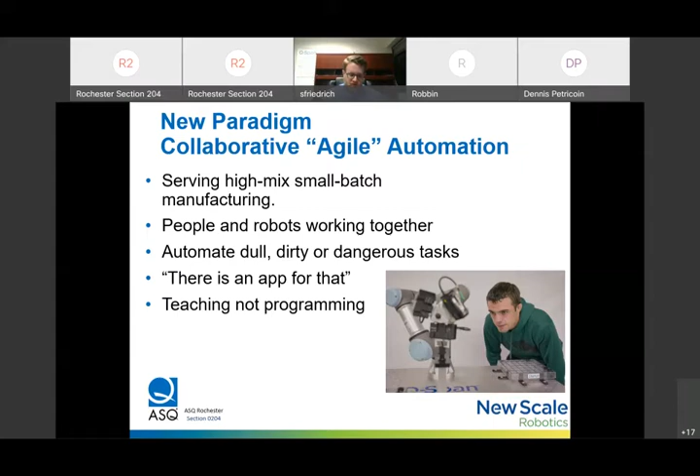These are often called cobots, which you'll probably hear a few times throughout this presentation. Some of you might already be familiar with them. And today, collaborative robots are the fastest growing industrial robot segment. Collaborative robots are different. They still do what most traditional industrial robots do. They automate repetitive and boring tasks, but this greater accessibility to automation has been made possible with cobots because of two main differences from the more traditional robotic systems you might be familiar with or may have seen in larger manufacturing sites like big automotive plants, for instance.

So these cobots are categorized as collaborative because they're force and speed limited, and typically they're able to operate around people without any guarding. You got to do a safety assessment if you attach something sharp like a needle or a knife to the end of the robot arm. It's probably not collaborative and safe anymore.

The interface has been made a lot more easy to use, taking more of an app-based approach to automation. Any new commands you teach to the robot are done right through a tablet that controls it, called the Teach Pendant, which is about the size of an iPad.

Most of the time when people start using the robot, they can have it complete some pretty simple tasks with just about 20 minutes of hands-on time. The fundamentals course for these robots is usually only about 2 days, and that's all most people need to learn to teach these new robots new processes. The robot interface has been designed to be usable by everyday employees, so you don't need to be an engineer or programmer on staff to use these types of robots on a day-to-day basis.

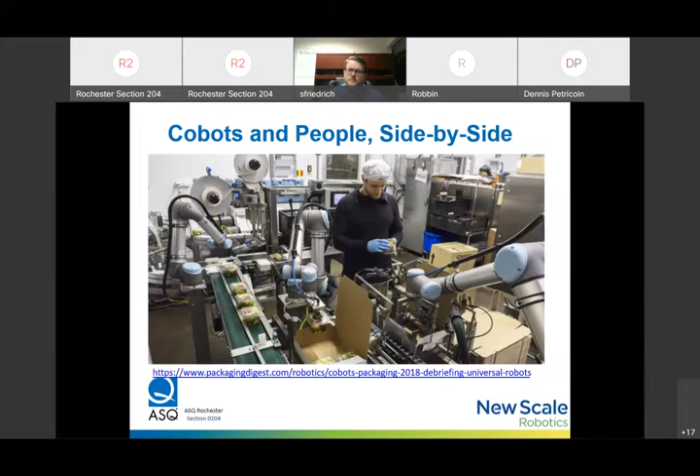A primary benefit of collaborative automation is that you can support higher mix applications, and you don't need to dedicate a robot to one task and one task only all day long. Generally it targets about 10,000 parts per month or so.

You can automate at roughly the same speed as a person, take up about the same space a person would need to perform a task, and improve the repeatability of the process. That space constraint is particularly important if you're operating in a small, space-limited metrology lab, or on the production floor and have to squeeze something in next to a machine.

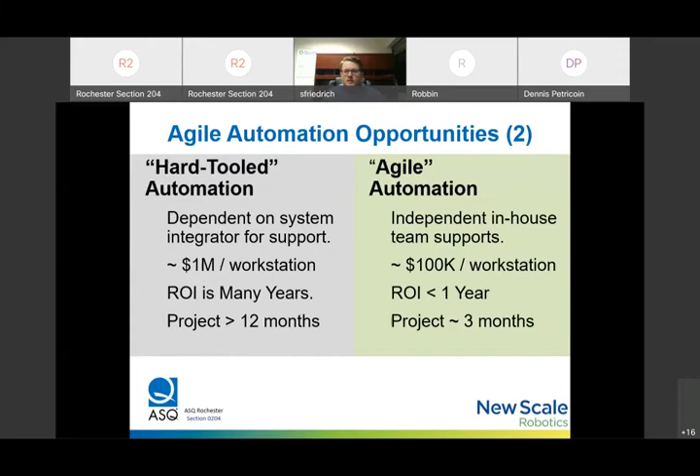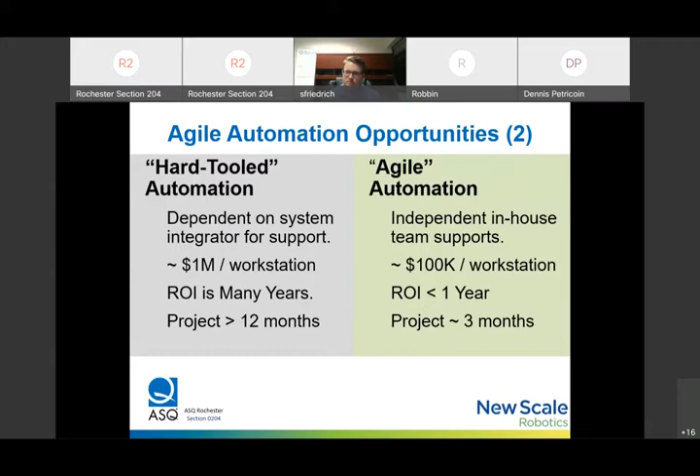In general, you can deploy these new automation systems with your in-house team. It takes up a lot less time to deploy the system and money to implement them, if you follow the appropriate steps and more of an incremental automation process, which we'll talk about as one of the best practices later in the presentation. If you follow this process of dividing automation into smaller projects, usually you can deploy something within 3 months or less, where more traditional systems might take 12 or more.

By far the biggest challenge we hear about on a daily or weekly basis is the labor shortage. It's something we're dealing with here at New Scale in some areas as we try to manufacture products. Most companies we talk to describe it as their top priority for the foreseeable future because they have an aging workforce that's retiring faster than new people are coming into manufacturing.

This puts stress on the existing team, which is probably smaller than it needs to be. And to keep up, you've got to maximize the output of each person. If that labor is not available, you might need to look for automated solutions to fill those gaps.

So we're seeing a lot of people either consider automation for the first time or accelerate their plans, because they either can't keep up and have these QC bottlenecks, or they can't find enough people to produce and inspect the products they make.

Generally, these larger automation systems I've been talking about used to be too costly for small businesses to adopt, but collaborative automation is making solutions more affordable. I think it's interesting, some research done by the MIT Task Force on the Work of the Future that I wanted to quote here.

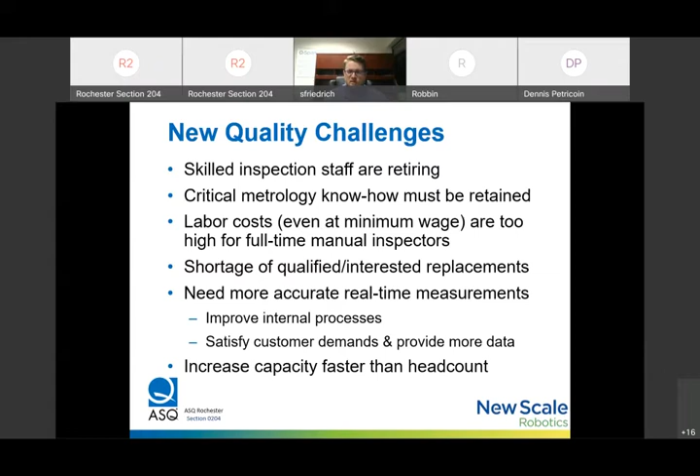So far we've seen a lot of early adopters use these types of robots, but we're starting to see more and more people reach out about automation and consider it for the first time, given all of these new challenges they're experiencing in the quality department in their company.

So quality applications have been of interest, but have generally lagged behind other more production-focused robotics applications, like machine tending, packaging, welding, or finishing type applications. We're definitely starting to see that trend change, with more people considering quality.

We talked with one guy and he said, I see everyone else getting a robot here, and I'm just in my metrology lab wondering, where's mine? I could use one. So with some of these challenges in mind, I wanted to look at some of the motivations we're seeing for quality on a day-to-day basis.

And the types of applications that you can look out for.

The first thing I recommend looking at is where your quality team spends the most time on manual inspection processes. We find that robotic systems that can fill in the hours of one full-time equivalent, about 40 hours per week, usually give people an acceptable return on investment, which can justify the use of a robot in the quality department.

But if you're at 80 hours or more, that's definitely ideal. Obviously, if you're able to use it more, you get a faster return, and more uptime is good. So that 80-hour mark is a good target, especially if you're running 2 shifts per day.

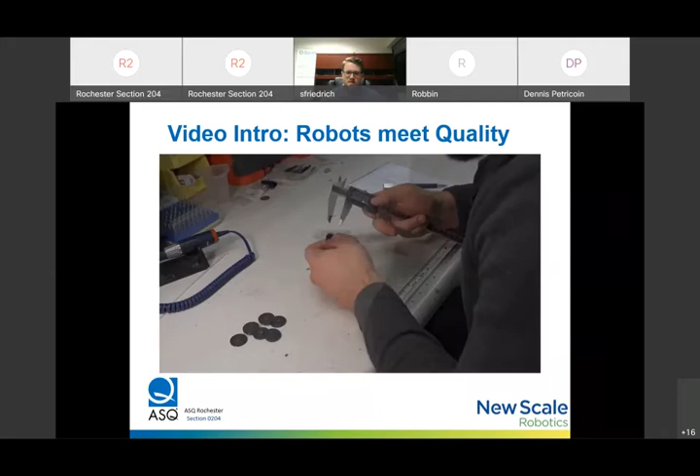We find a lot of the time manufacturers don't have a really good grasp on how much time they spend on quality and inspection. I mentioned that's an important metric for identifying which types of applications you should look at for automating. I think this is because a lot of teams don't necessarily have one person sitting at one station doing that same thing all day long. It's a lot of different tasks.

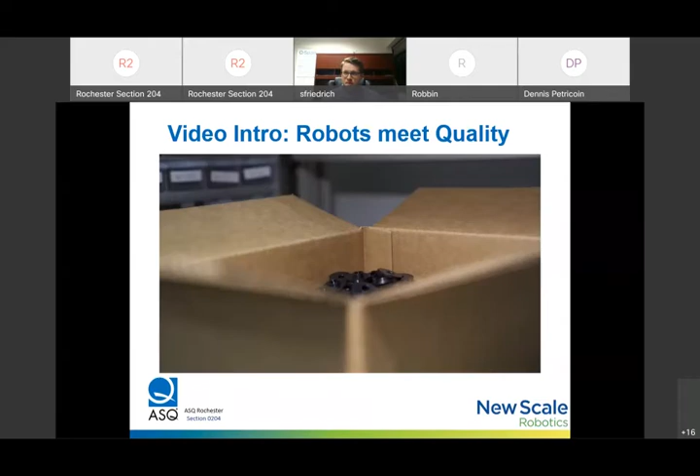We've been talking about higher mix type applications where you're measuring one part for a particular amount of time, and then you swap off and you're measuring something else a little bit later. So we find that the best candidates for automation are not the hardest QC processes you have, but they're things that are very simple and time consuming.

Depending on the complexity, it might be worth automating if you spend 4 to 5 hours per week on a particular inspection task. And if you have 8 types of parts to be inspected, each at 5 hours per week, that adds up to one full-time equivalent, that 40-hour mark that I've been talking about. Certainly if you have tasks that fill up more time, even better and easier to deploy.

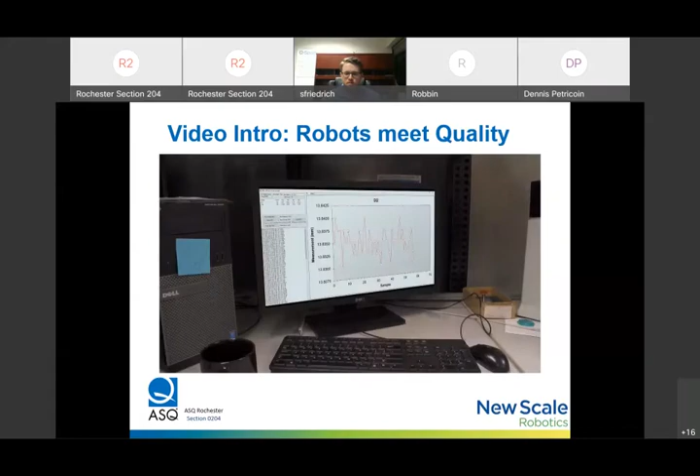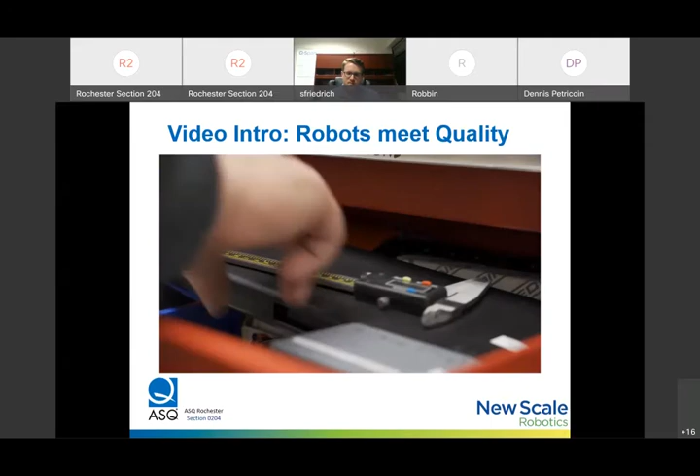Depending on the application and setup for a particular project, with these types of robots, a lot of the time you might need to swap out a fixture or two, or load up a new program, but that should only take a few minutes. Again, it's kind of application specific, but being able to change from one task to the next in about 5 minutes is, I think, pretty powerful and keeps your team flexible.

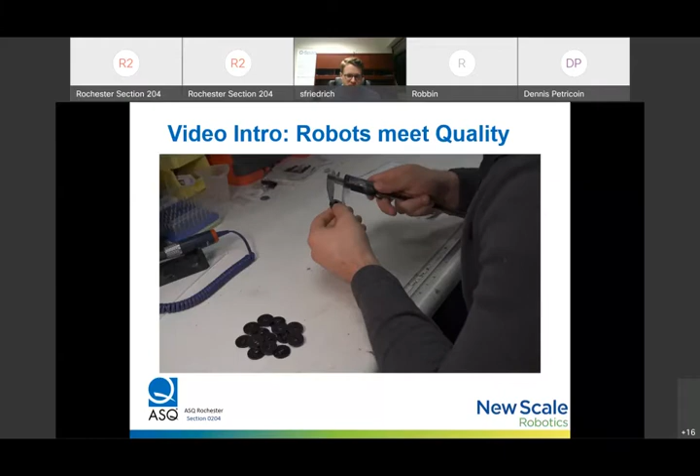So this video shows our product, the QSpan workstation. Since I'm talking from experience with a lot of these applications we'll be running through, I'll show this system a few times. We're just going to kind of describe what we're doing here.

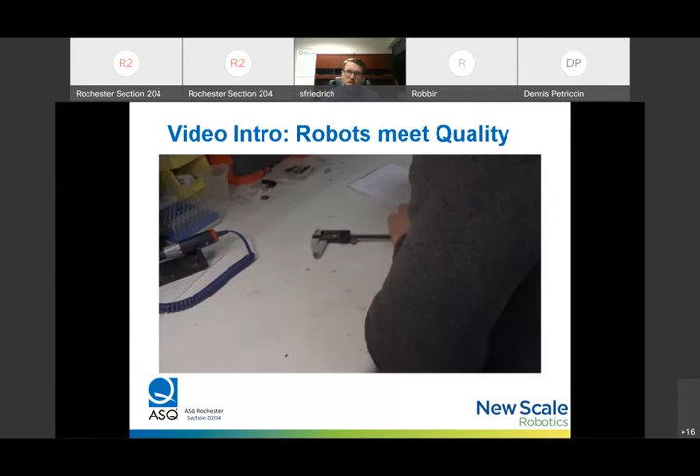We use a robotic gripper that also functions as a digital caliper. So it lets you do material handling and also part inspection, and dimensional gauging plus data logging, all with one tool. So just keep that in mind as we're going throughout.

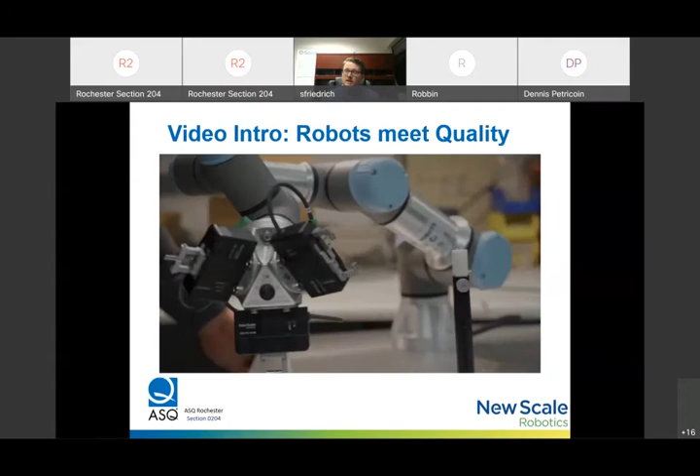As it picks up the part, it is measuring it, and that's part of one of the technologies I'll talk about today. But in general, where I'm showing the basic concept that I've been talking about, it's automating at about the same speed as a person would need to perform at for their daily functions, taking up about the same amount of space they would need to sit at a bench and inspect parts.

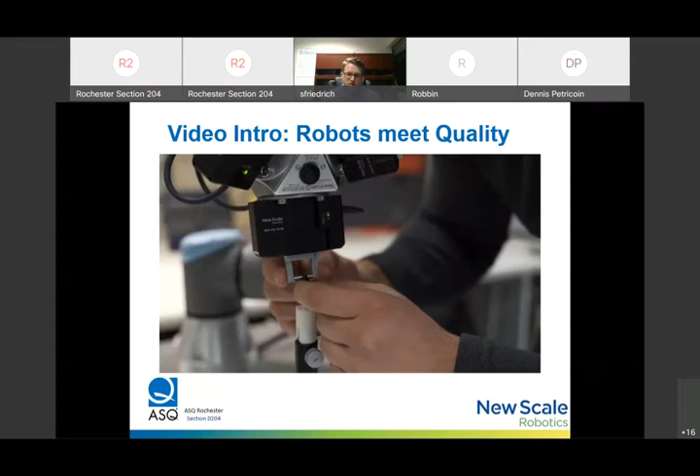And you get all the benefits of automating with improved repeatability, automatic data collection, and then that person can go do something that's less repetitive and more productive and better suited for a person than a robot.

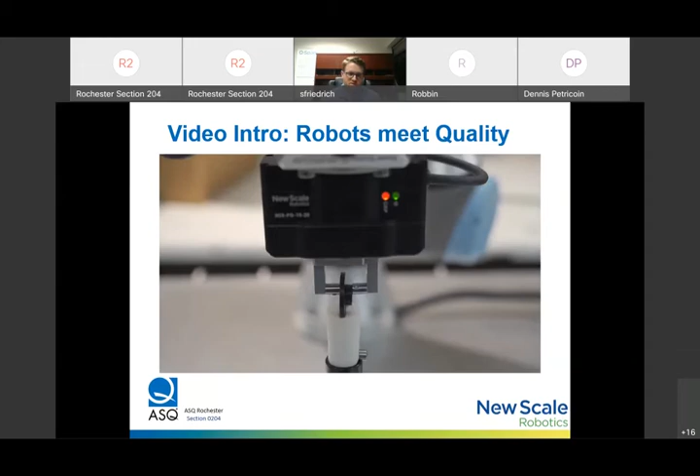So when we think about ideal QC tasks to get started with, it's really the same as any automation project. I'll reiterate this because I think it's important: we find that the best candidates for automation are not the hardest possible processes you have, the ones that give your team the biggest headache every day, but they're things that are just simple and time consuming for your team. So approaching automation one step at a time with that in mind is important, particularly if your team's just getting started with deploying robots.

So this idea of incrementally breaking up the projects is really a good way to divide the big goal into smaller, more manageable projects, and also manage your expenses, reduce the risk of the project not being deployed, and reduce schedule and scope creep. It gives you smaller successes to build off of each other, builds confidence in automation after each step, and gives you a positive return on those smaller investments as you move through automating all 10 steps in that process in the future.

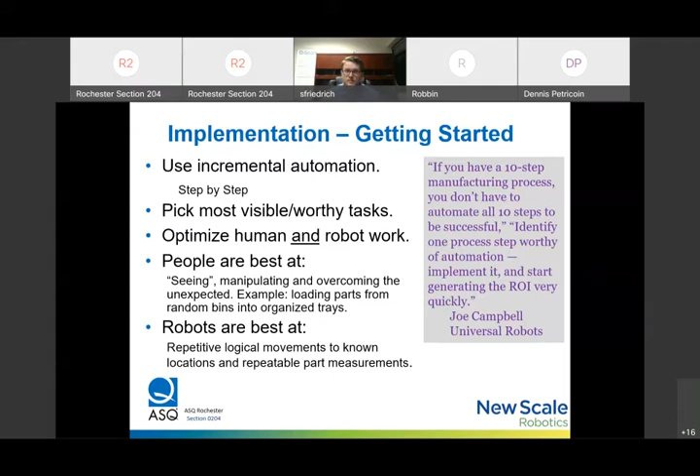So I'll kind of break this up into contact versus non-contact type solutions. After you identify a gauging process or other types of inspection tasks that are time consuming and worthy of automation, it's important to identify the types of gauges you're using, where you're using them in those processes, and the available automation tools to help you actually automate those tasks.

So a lot of the time, the gauging is being done on the floor by the machine operators, machinists, or other production staff as part of the manufacturing process. And that's, I would say, 95% of the time where we see interest in deploying these systems is not in the metrology lab, but actually on the production floor.

So usually we see manual gauges being used, things like calipers, bore gauges, drop gauges, air gauges, go/no-go gauges. They're really great for checking dimensions quickly, referencing a drawing, but if you're doing them all day long, you're bound to run into some errors.

It's overhead cost for your company, and some people even have turnover just because they have someone doing inspection all day and it's so boring they just want to end up doing something else.

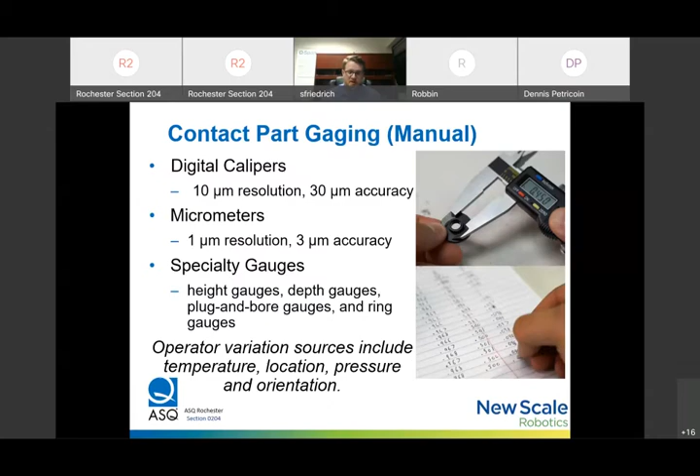Newer manual gauges have started to incorporate technology to connect them to QMS or SPC systems, embracing the trends we're seeing in Industry 4.0 of needing easy collection of digital data. And they're usually wired - there's some wireless solutions available as well. But each data point still needs to be collected manually, often by pushing a button or using something like a foot pedal. And we're seeing a huge requirement for more and more data to be collected in manufacturing processes.

And that data and the integrity of the data is definitely important if you're working in a regulated industry. So using robotics to help you automatically record and store that data should definitely help you improve the accuracy of the data collection. You reduce the likelihood of falsified data and help you avoid non-conforming inspection ratings.

So we're starting to see many manufacturers recognize the benefits of digitalizing their data and searching for solutions to interface all their measurement tools for analysis into a single software program whenever that's possible. It's just easier to have everything in one place.

So I thought it was interesting though, in Quality Magazine, they spoke to Infinity QS, and they said that after talking with 260 manufacturers, they actually found that 75% of the people they surveyed still collected data manually, whether it was these tools or something like writing it down by hand. And that 47% of those they surveyed were still using pencil and paper.

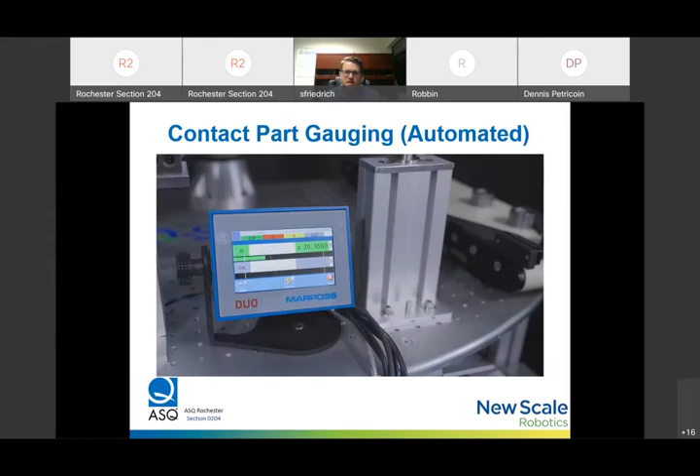So here's a contact part gauging example using the QSpan system. We use the UR robot, the robotic gripper calipers, automating material handling and contact part gauging.

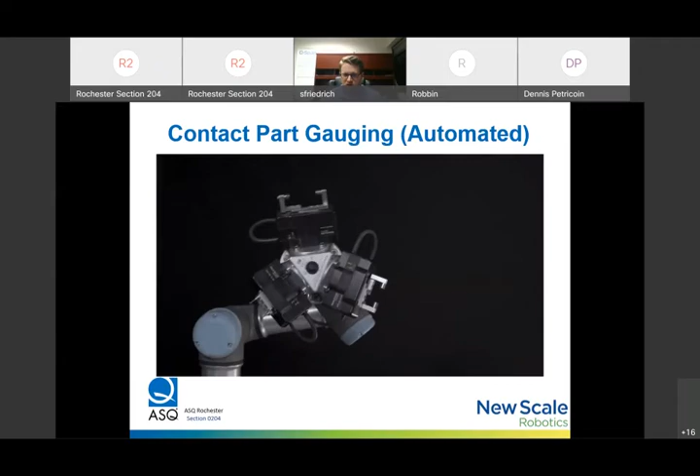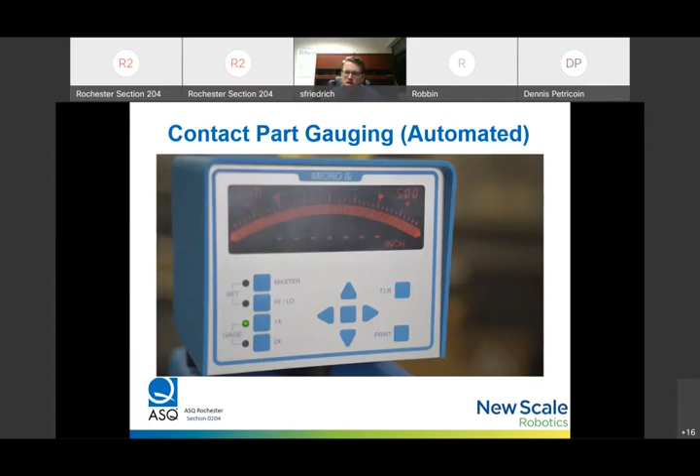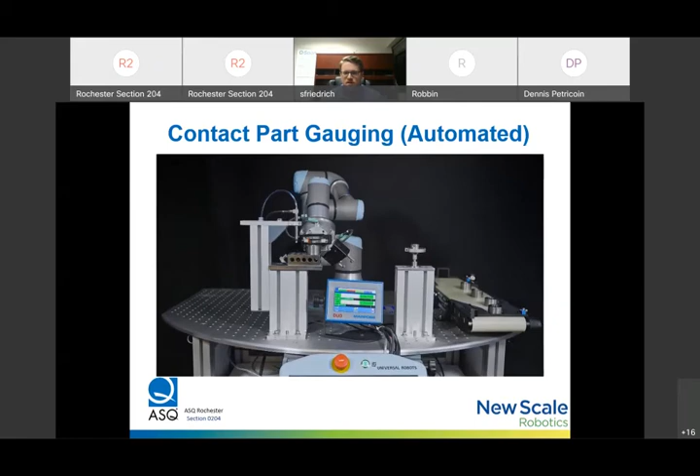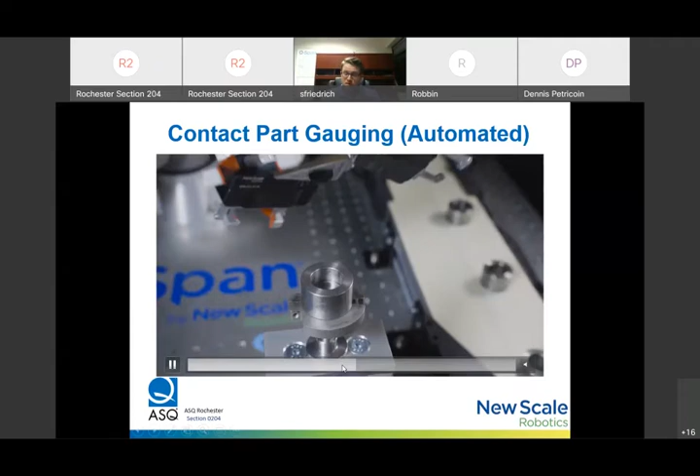So we know that calipers are not the only tools that are used for automating inspection.

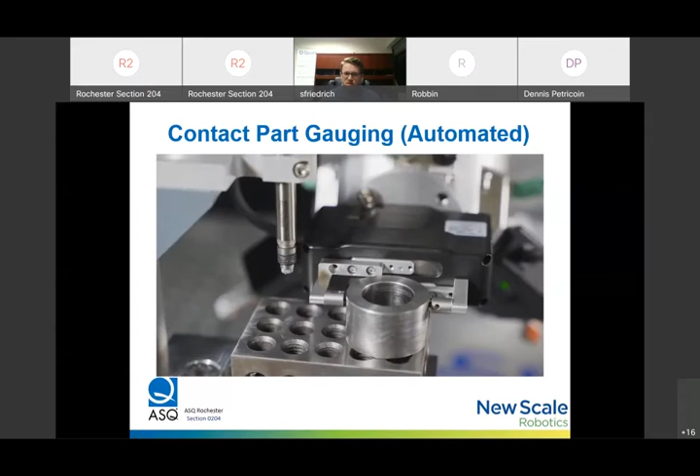Here we're showing the robotic caliper picking up the part from a known location at the end of a conveyor. We load it onto a bore gauge to measure the inside diameter. We bring it under a pneumatically actuated LVDT probe, which functions effectively as a height gauge, measuring the height of the part. And then finally there, we just measured the outside diameter with the robotic caliper, using precision flat fingertips to measure that OD, and then move to the next step.

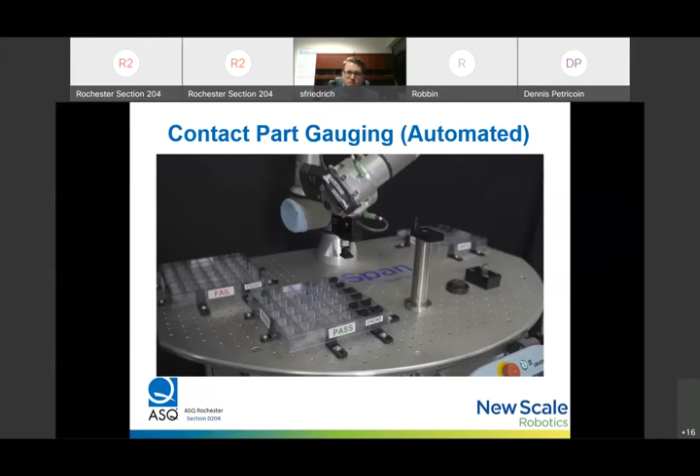So usually with contact part gauging like this, rather than pick and place, you're picking the part, measuring the part features, recording the data into your quality system, and then placing the part into a pass-fail location, or sorting it based on size, based on that measured data you just collected.

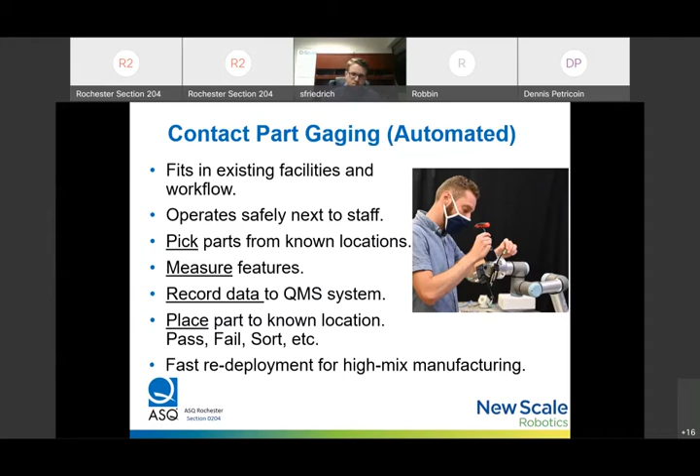But again, some of these systems are pretty expensive and kind of fall into that hard-tooled automation category I was talking about before. They still also require you to manually load the parts in and out of the system a lot of the time, unless it's something inline, like measuring parts on a conveyor, for instance. And they can definitely be a bit more complex to automate, which really depends on the technology and the type of application you're trying to use them for.

There's also tools for laser scanning and machine vision, but those generally require some programming experience and can be a little more difficult for an everyday employee to automate. A lot of the time we see that integrators or customers with automation teams tend to tackle those types of applications because they are quite a bit more complex.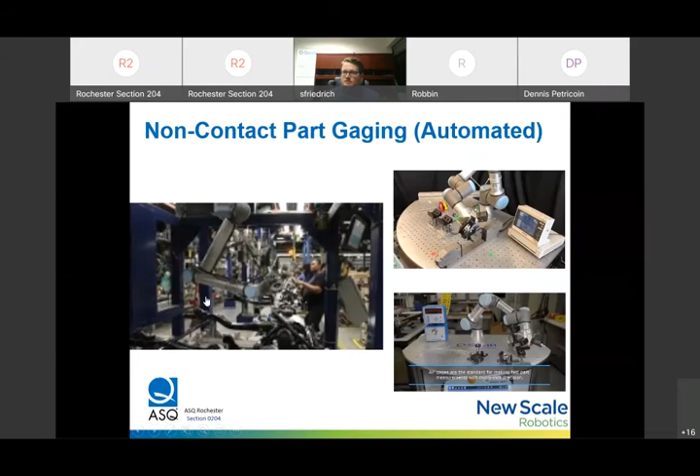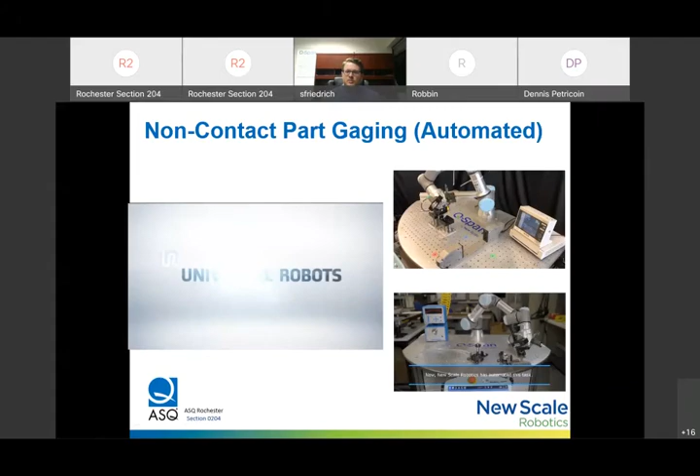So these are some non-contact gauging applications that I wanted to highlight. The video on the left shows a camera being mounted to the end of the robot arm, checking an electrical connector that's locked in position in the subassembly. The customer had some stationary cameras they were using, which were okay, but the robot lets them get into some nooks and crannies they couldn't really get into unless they had a person do it. The robot's much more repeatable than the person would be.

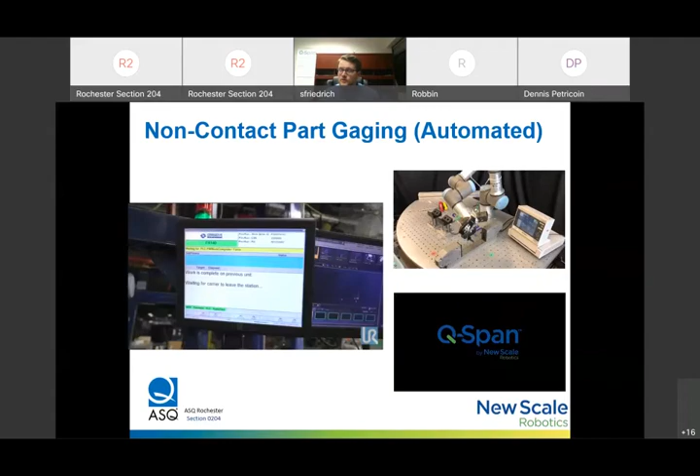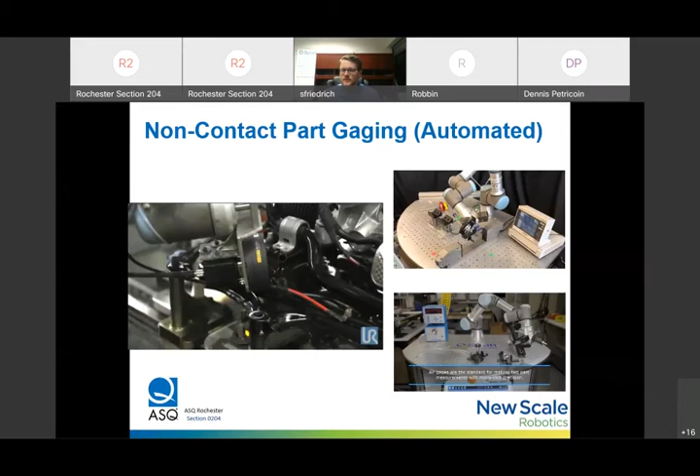The top right video, we're just loading a drill bit in and out of a laser micrometer. I can provide these videos separately if anyone wants to see them a little bit larger and in higher resolution. And then the final video on the bottom right shows how a collaborative robot can automate loading and unloading of an air gauge to do those inside diameter measurements.

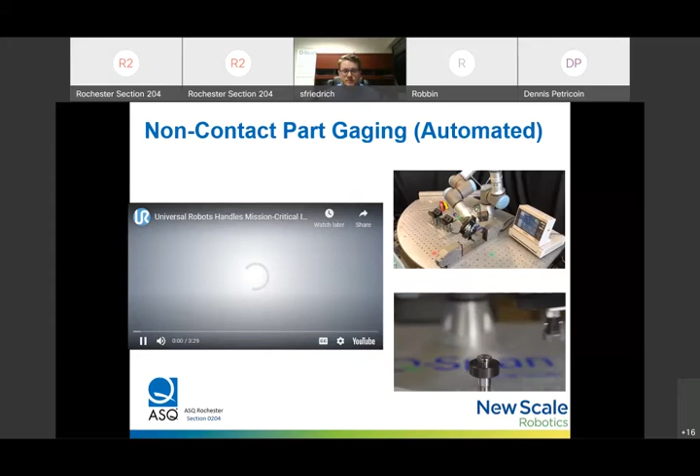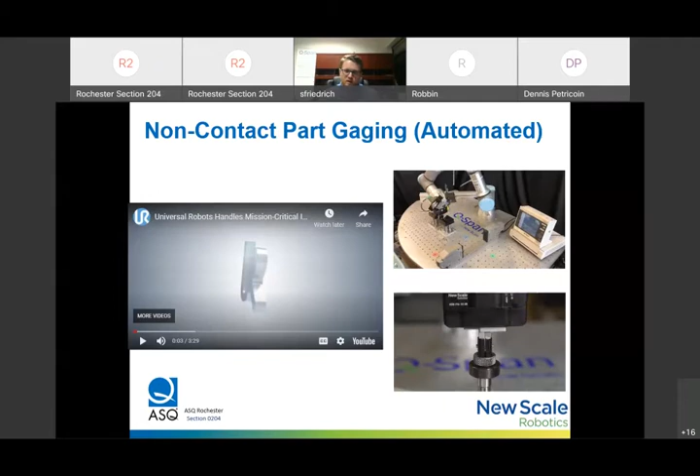Air gauges are extremely accurate, a reliable technology, measuring parts very quickly with micro-inch precision. It is an older technology, and they do generally require loading with a pretty tight clearance. Here we're showing that the robot can in fact load and unload it just as a person would.

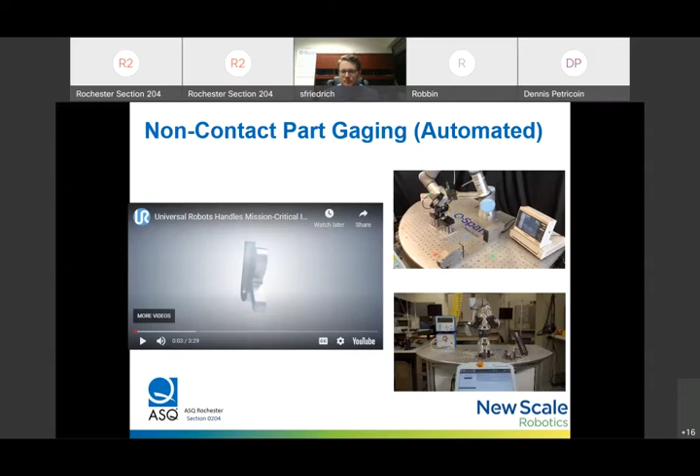This shows that you can automate some of these older types of technologies that are available. And in all three of these applications, the data from the inspection process is being recorded digitally and automatically, not manually.

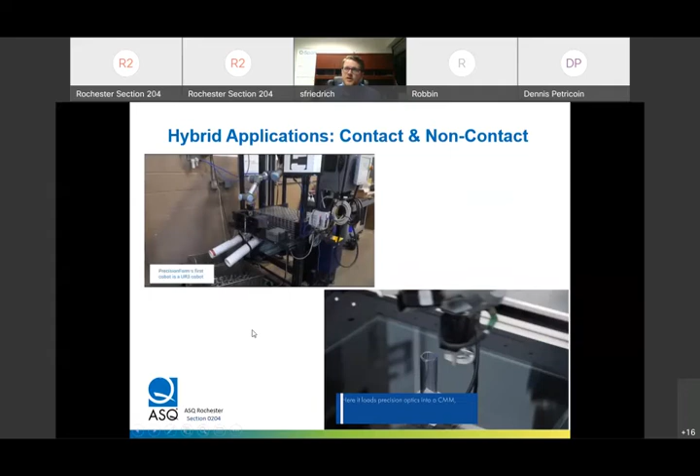Here's some hybrid applications that show some contact and non-contact techniques.

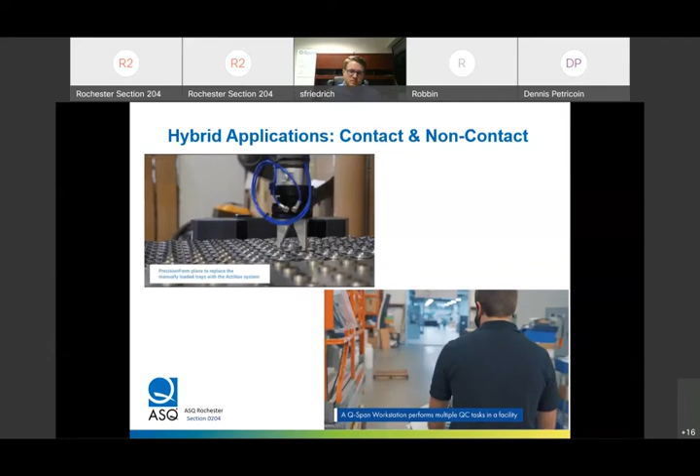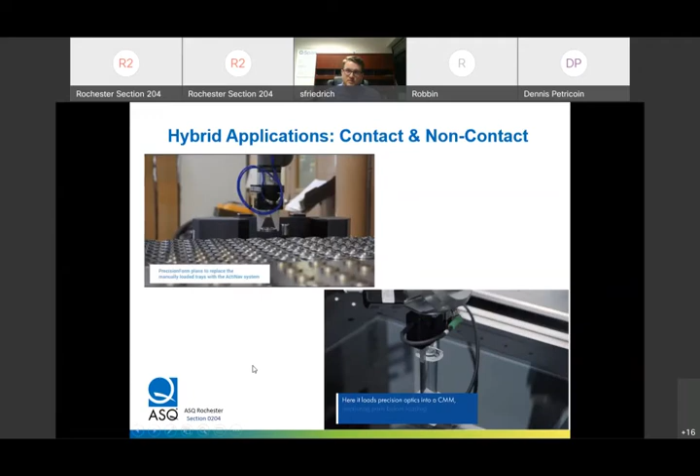So the top left video, this manufacturer was using a collaborative robot. They're picking up a part from a tray, they load it onto a bore gauge, and the bore gauge is actually seated within a laser micrometer's field of view. And that's kind of a unique application, but it lets them do the outside diameter with the laser micrometer and the inside diameter with the bore gauge all in one shot. So it's kind of two tools combined into one.

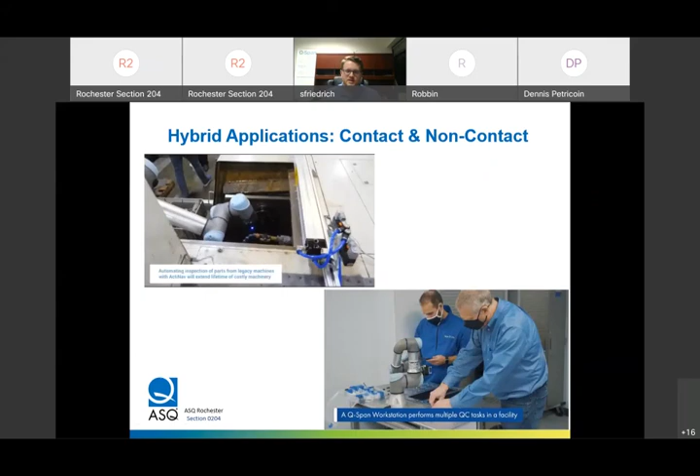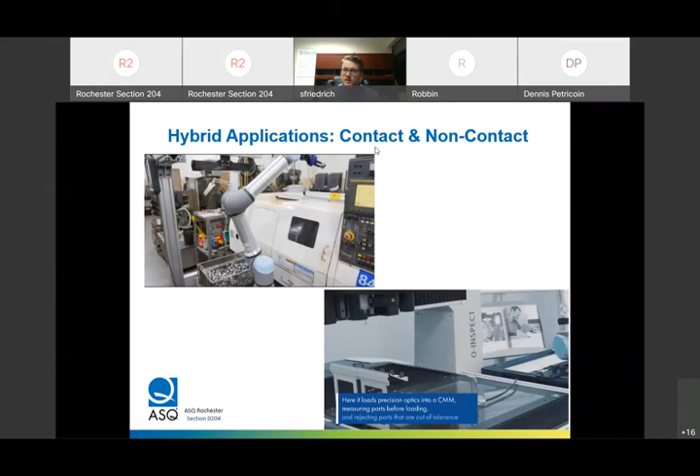And for example, if you needed to swap in a different sized bore gauge to do a different type of part, you could easily do that, and then just take the new reading from the laser micrometer, take the reading from the bore gauge. So it is still flexible, even though this application looks a little intimidating and sort of complicated, but it should be fairly easy to deploy and redeploy.

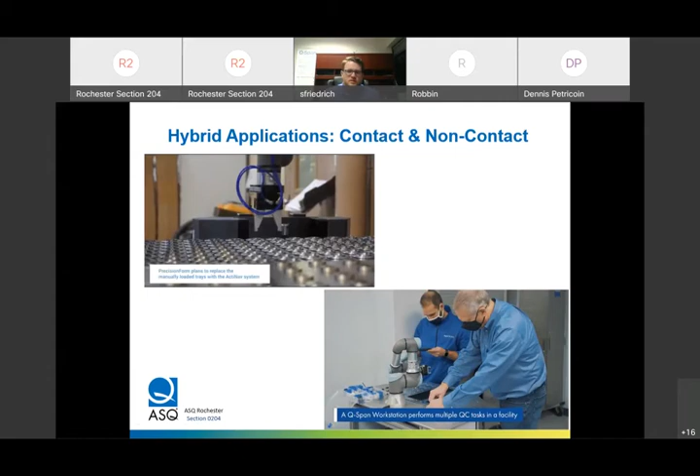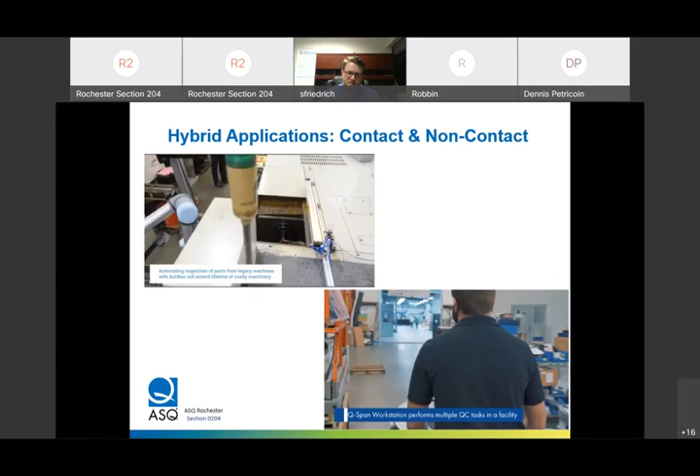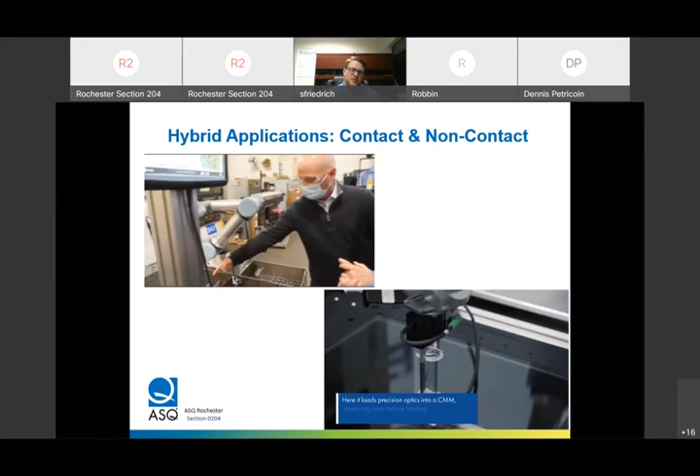We're also seeing some interest in some quality lab applications. I mentioned it's not the most popular and where we see the most interest, but having a lot of industries that have these big growing demands for stricter quality control requirements, more data, a lot of the times that can lead to bottlenecks in the QC lab, just because the gauges on the floor are sometimes ill-equipped to do the types of measurements that might be needed. And we'll just throw it on the CMM, and that can end up leading to a lot of bottlenecks.

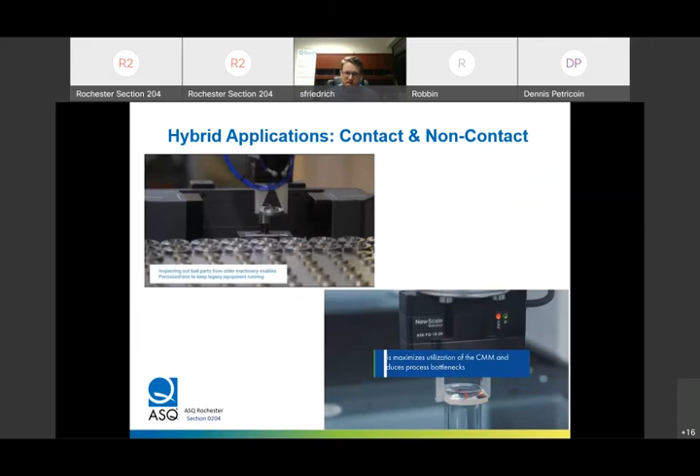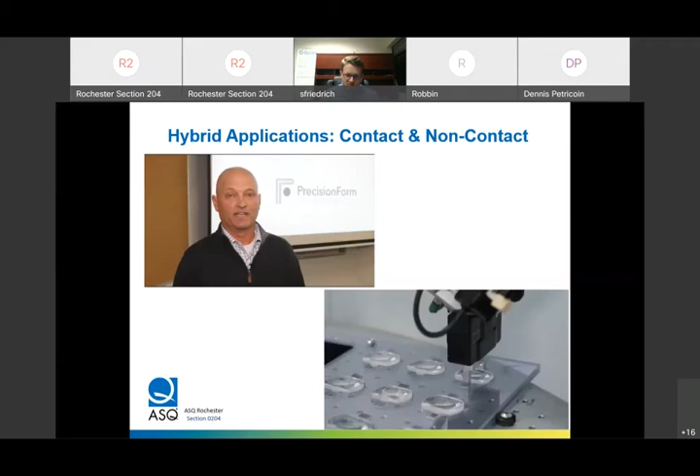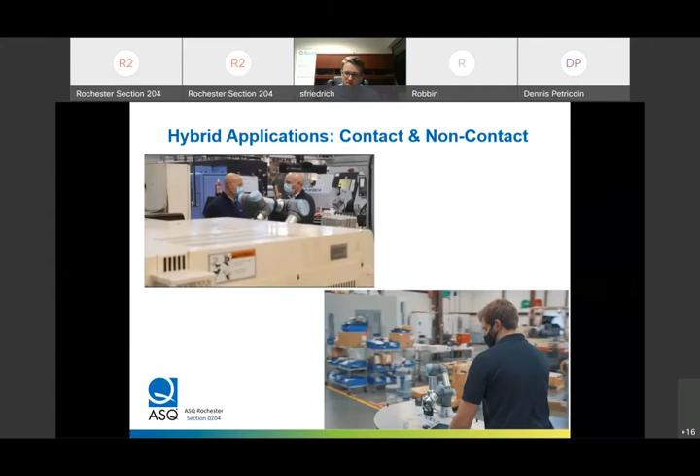And there's definitely a big opportunity cost there for dedicating your valuable inspection equipment and usually pretty valuable inspectors, your CMM programmers, to sit there and really babysit the CMM while they're just kind of loading and unloading the same part for hours on end. It's just not really a good use of somebody's time, especially if it is a CMM programmer, because they're pretty skilled technicians that can cost anywhere from 25 to 30 an hour.

So the cost for implementing something like this would really be comparable to the annual total cost of 1 to 2 full-time CMM programmers. This is an interesting application in a hospital.

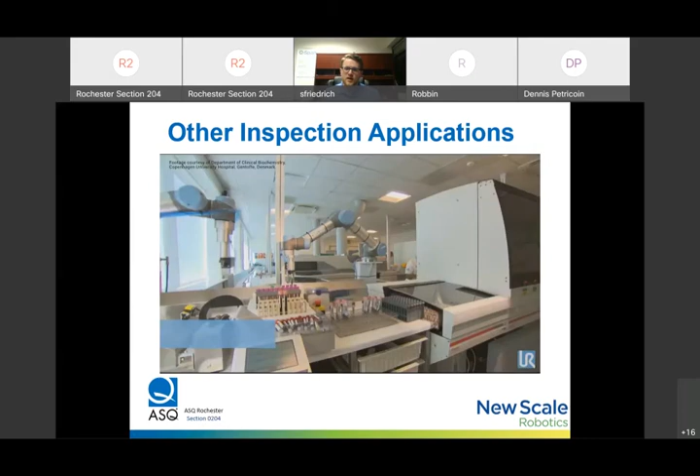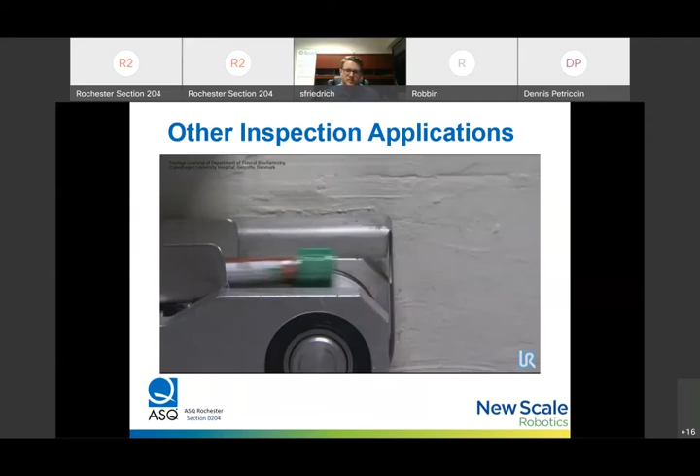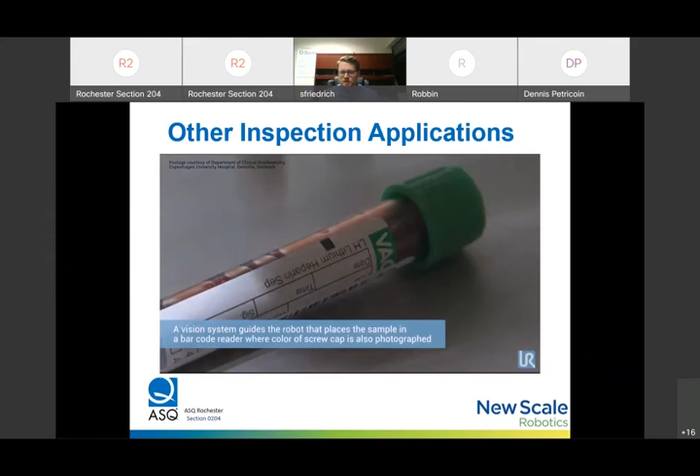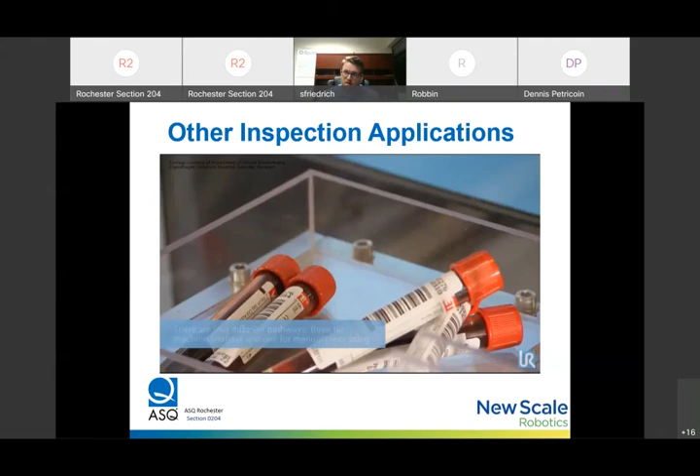Quick warning to anyone that doesn't like the sight of blood to just look away for the next minute. In this application, one robot picks up a vial for a blood sample, reads the barcode, and then inspects the cap with a vision system, sorting them into one of 4 different batches for analysis. Then a second robot picks the vial and places it into an entry module, which carries the sample to centrifugation and analysis. So it's not really a gauging application like what I've been talking about with measuring dimensions necessarily, but I think it's a cool example of some other ways to use robots for automated inspection or automated testing.

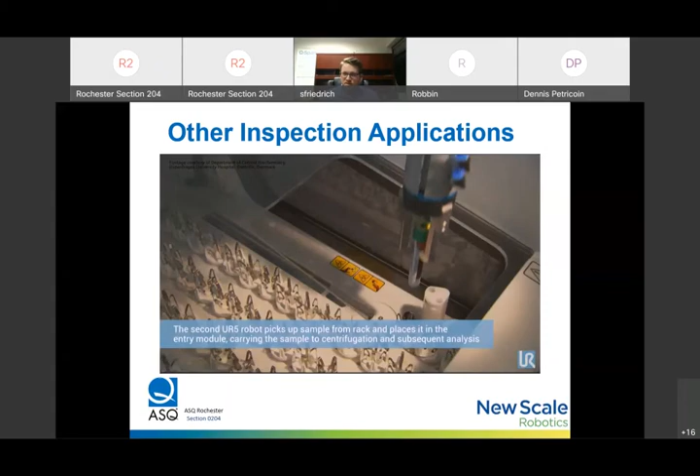So hopefully we didn't lose anybody with that video with the blood, but I'll jump to the next slide here.

I have mentioned a few times return on investment is a really important metric, and it's true for any capital purchase. So if you're looking to get started on an automation application, ROI is probably one of the first things you should understand and calculate. There's some good resources online to help with this. There's an ROI calculator from automate.org. I can send anyone a link that's interested, but there's the URL on my screen there.

For any of the applications I was just showing in those videos that aren't provided by New Scale, I can't necessarily speak to the price of them, but in all of the case studies there, the customer states that the ROI they achieved was less than a year. So that kind of shows you the accessibility of some of these new types of technologies for smaller businesses.

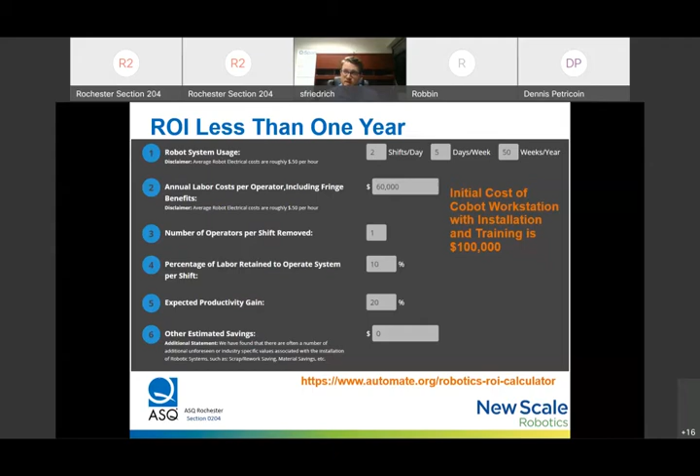So the benefits definitely go beyond ROI here, and especially nowadays, providing world-class quality is not really just an expectation in today's global economy. It's really become a requirement as you're competing globally. So, and by far the fastest way to lose a customer is bad quality. And automation can definitely help with that.

There's a lot of benefits to automated gauging that go beyond just the financials. Some include better gauge R&R, better process control, leading to better yields, and even more engaged production teams because they're doing fewer repetitive and boring jobs. And again, these are a little harder to quantify in an ROI analysis, but they're worth thinking about as you evaluate the application and weigh some of the pros and cons.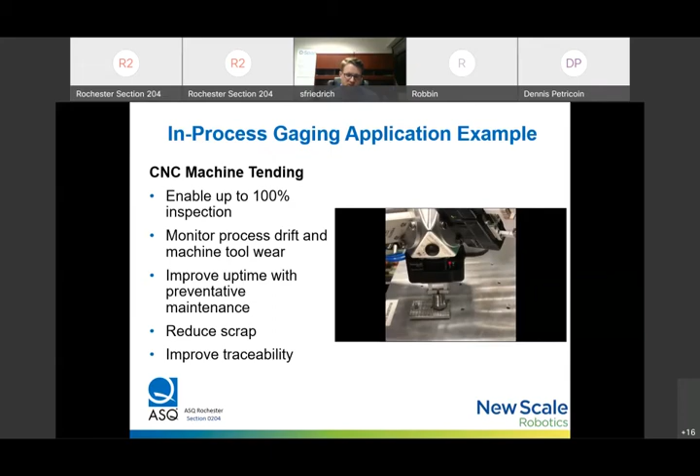In this application, the customer's just picking up the part and measuring several dimensions on this machined metal part. Really what we're doing here is making sure the part's in tolerance as it comes off the machine. This type of machine tool application is very common. Machining and machine tending, especially metalworking, is one of the biggest and fastest growing applications for these types of robots.

So when you're automating these types of processes, it helps with process control. You can see if your machine tool is starting to wear based on the measured value you're getting from the part you're inspecting. It can help you have less of a goalpost mentality of an upper and lower tolerance limit, because if you're able to measure the part consistently, you can even create a closed loop system with the gauging process that lets you automatically adjust tooling offsets to compensate for tool wear and produce better parts closer to nominal every single time.

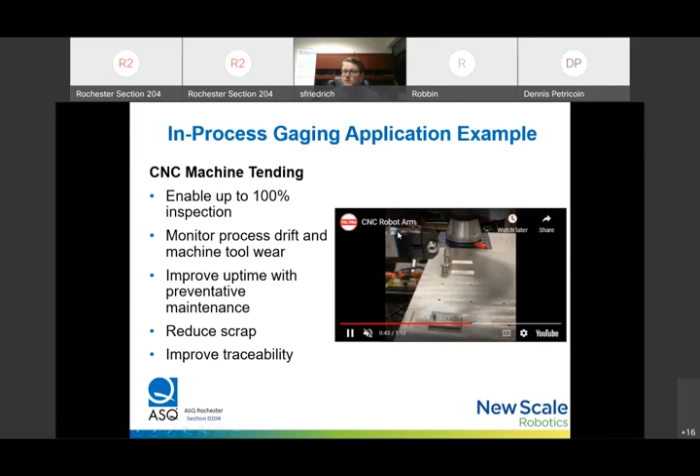Selecting the correct robotic gauge is an important step, and usually we recommend you try automating your existing gauging methods first. For example, if you're using a manual digital caliper today, use a robotic caliper to do the same measurement. Or if you're using a bore gauge, automate that bore gauge. If you're using a laser micrometer, automate that laser micrometer. When you do this, you're really expediting the validation and correlation studies. If we're completely changing the methodologies we use for part measurement, it definitely extends the project and development time. Rather than just qualifying the robot and making sure it's getting repeatable measurements, you have to requalify the gauge, and that's just an added step in the process. Sometimes it's required, but generally, if we can avoid it, we do.

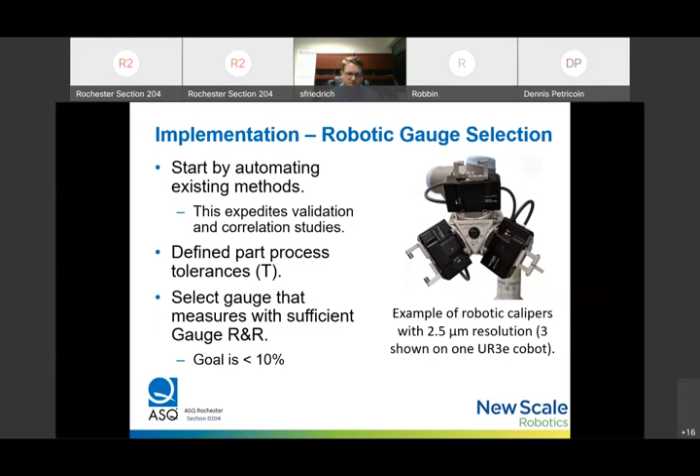Understanding the part feature you're measuring is definitely important, and optimizing the gauge for that is important. We need to understand that we can achieve a sufficient gauge R&R, and generally the goal is less than 10%. We've had some customers that have less than 5% as their goal, but less than 10% gauge R&R is usually acceptable.

Selecting the appropriate gauge is probably straightforward and understood by most of you. When you're using a robotic caliper, it's critical to understand that you have the right fingertips to make the measurement you're trying to record. This chart is an example that follows some well-established metrology practices. For example, we'd use flat fingertips to measure something like an outside diameter, or precision sapphire probes to measure something like an inside diameter. Just like gauges, robotic caliper fingertips can be customized to gauge a specific part feature.

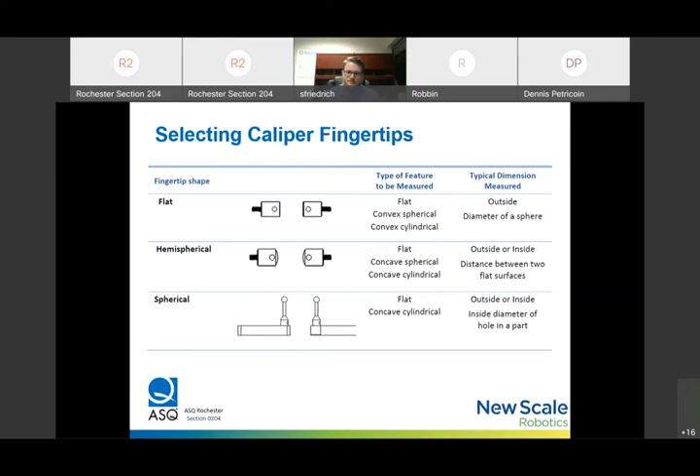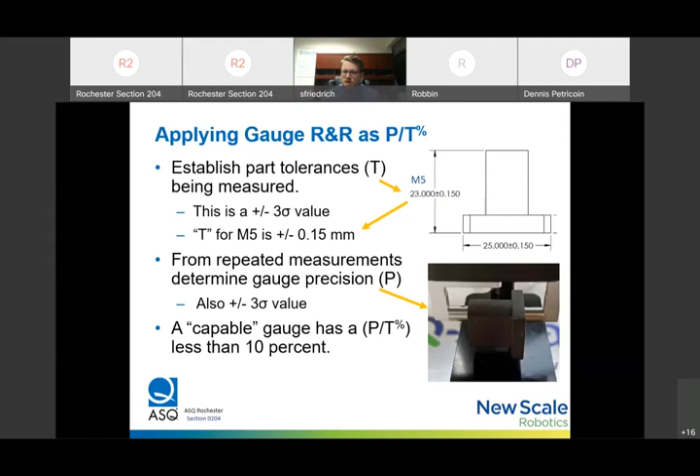So we'll look at a gauge R&R calculation for a sample part with a robotic caliper. Establishing the part tolerance T in this case is established in the drawing. In this quick example, M5 has a tolerance of plus or minus 150 microns. We interpret this as the 3 sigma value. Next, we have to determine the repeatability of the measurement using our gripper caliper, which is the gauge we're using in this case. The repeatability is P, the gauge precision, also a 3 sigma value. The robotic caliper has a repeatability of plus or minus 5 microns. So if we look at the ratio of P over T as a percentage, a capable gauge has a percentage of less than 10%.

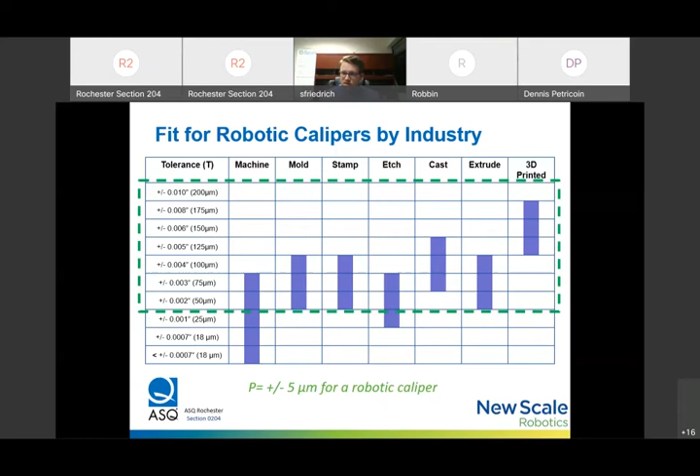We get asked a lot about how robotic systems are calibrated and maintained. It's definitely an important thing to keep in mind and understand.

We use NIST traceable artifacts like gauge blocks and ring gauges to periodically zero the gauges we deploy. This can usually be automated and performed by the robot itself, requiring no intervention from the operator, so long as the masters are stored on the workstation and can be easily accessed by the robot as part of a program. That can really be done as frequently or as infrequently as you like.

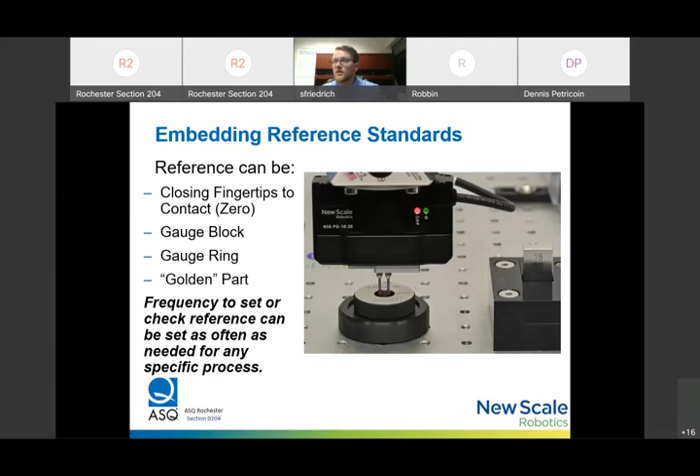The gauges themselves are recalibrated by the manufacturers. In our case, with the robotic caliper, they can just be shipped back to New Scale for a factory recalibration, again at whatever frequency you require. If you want to do it every 3 months, great. Every year, every 2 years, whatever it may be, based on your own internal processes.

It's a really intuitive interface. I mentioned earlier, if you use the system for even 10 to 20 minutes, usually you can pick up on some of the basics and do something simple like picking up a part and placing it in another location.

The programming and commands that you teach to the system are done sequentially. So a basic pick and place task would be something like: move to point A, then move to point B, close the gripper, capture a measurement, move to point C, open the gripper to release and drop the part. It just kind of goes step by step.

It's really logical and pretty easy to pick up on. Once you have a program developed, it's really like using a smartphone app or loading a Microsoft Office document on your computer. You just pull open the file, hit play, and then you can leave and the robot will run itself.

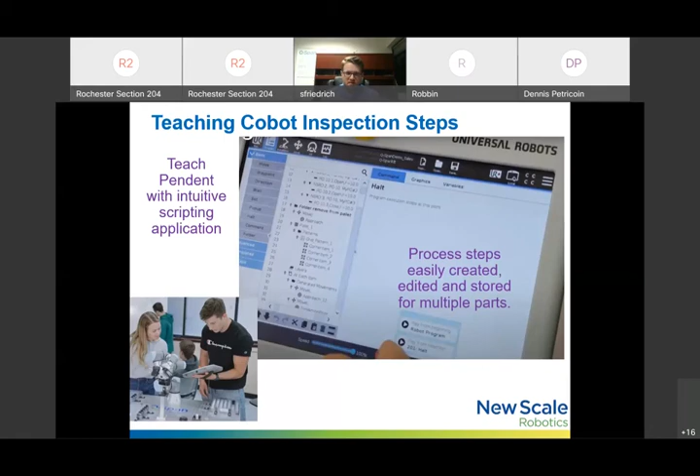Generally data transfer will happen in an ASCII format. It's usually just an Ethernet connection that plugs into your PC, and you can download the data as a CSV or an Excel file, add things like date and timestamps, serial numbers, etc. You can also interface directly to your SPC software or QMS.

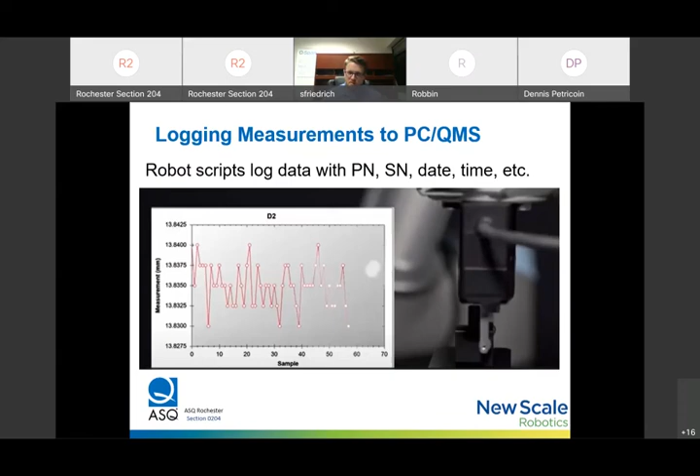So wrap up here. Sorry, I went a little longer than I had expected, but let me just highlight a few takeaways. We can answer some questions.

Automation now is generally a lot more accessible to smaller manufacturers than it used to be. If you haven't taken a look at them, I encourage you to give them a try. At least pop on that Universal Robots website and or Google the Universal Robots Academy and try that out.

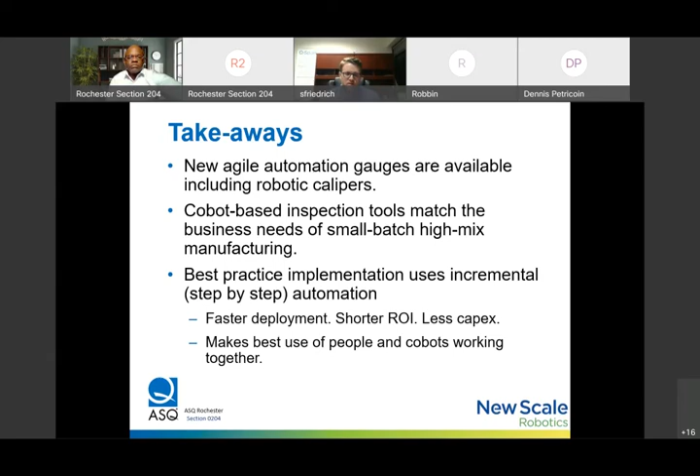As you're actually deploying and looking for gauging applications, I think there's really two main things to keep in mind. One is tackle automation incrementally. It's really important to divide up processes into small, manageable chunks, and also try to automate your existing gauging processes first. Don't try to completely change the gauge that you're using and how you inspect the part, but see if you can just automate what you guys are doing today and use that as a starting point. So I think that's all I have.